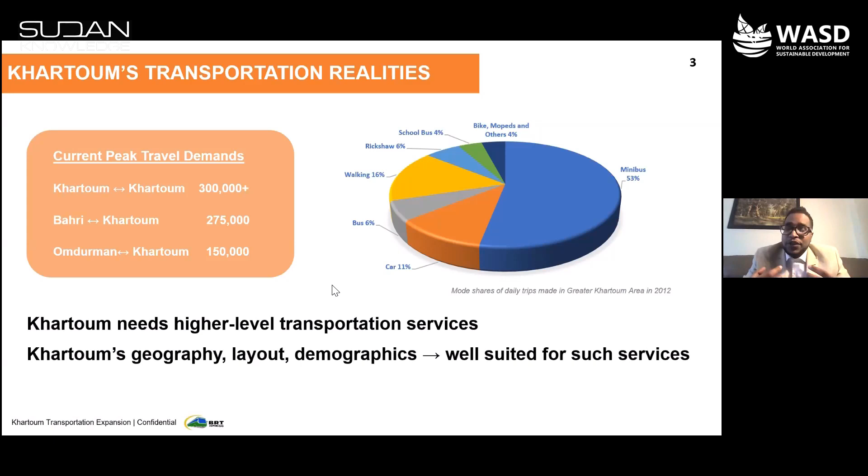If we dedicate lanes in the BRT system, we will be able to cater to more traffic. About 40% of the traffic will improve. There is cultural acceptance to public transit, and there's a large young population who will use this public transit. We will innovate. We are not looking to reinvent the wheel here. We're trying to solve a problem and create structure for transportation in Khartoum.

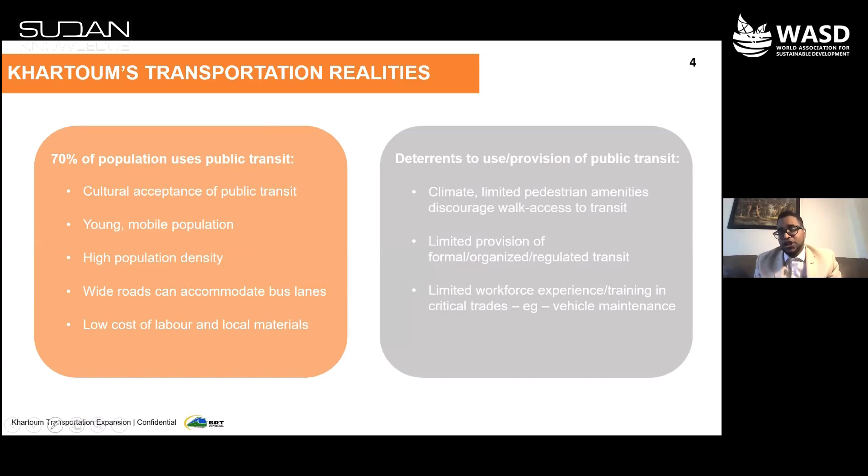A lot of the issues happening in Khartoum, and our report shows that every $1 invested in transportation has a return of investment of about $4. This shows there is a lot to be done, and it will benefit the economy of Khartoum a lot. It would reduce a lot of the health risks to have our BRT system set up in Khartoum, and reduce traffic congestion. There is urban livability improvement, and the air quality will improve.

The slides here show the layout of Khartoum and how transportation will improve this. We have a report that breaks down the feasibility. That report is also in our BRTEXPRESS LinkedIn account. If you click BRTEXPRESS on LinkedIn or search it, you will be able to see our report and our presentation. The report gives a detailed breakdown of how the project is feasible. We also have a construction company that broke down options of the BRT system.

Adam will go into details about this. Adam, if you could share so we level up with everyone about the issues of the BRT and explain what BRT actually is. Do you want to share the video, the one-minute video about the BRT that we have done? Why don't we, if you can pull that up, Hussein, I don't have that ready to go right now. But I'll take over.

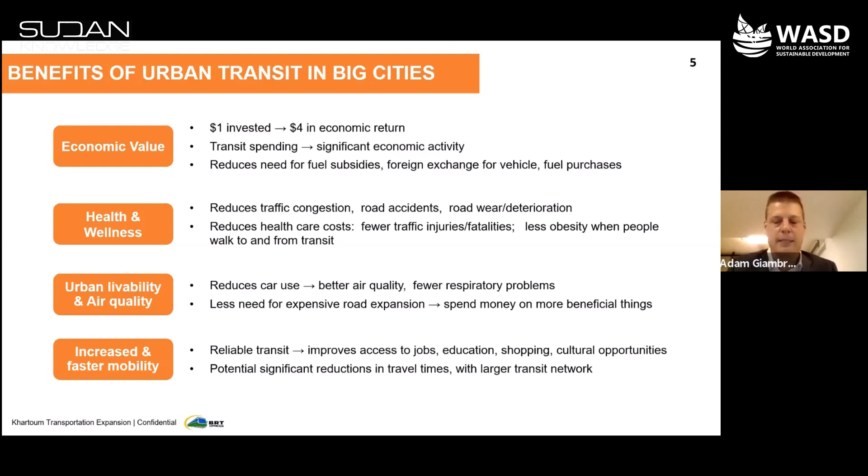So very quickly, and I understand we are tight for time, so I'm not going to go through every slide here. We have put it up, as Hussein said. I put the report. We have close to a 100-page report that we presented to the minister, and you can see it there, so there's lots more detail, and I've also put this presentation up if you'd like to review it.

But very quickly, we reviewed the different modes of transportation. What I think you're going to find here is that our focus on transportation is about being realistic. Khartoum is a city of upwards of 8 million people, growing perhaps to as much as 15 million by 2040. It is one of the fastest growing cities in the world, and anybody who knows Khartoum knows how fast it is growing.

But realistically, in the context of Sudan today and in the near future, options like a large subway or metro system, or light rail that cost in the hundreds of millions of US dollars per kilometer, are just not realistic. They also take a long time to implement in terms of the engineering, and because of the specialized technology, require a lot more hard currency.

So you're going to see, as we talk about bus rapid transit, that this is a solution that is implementable with the current expertise in Sudan today, which means you have to do very little bringing in people or equipment from outside. We've also put it in the context of a system that can meet the demand.

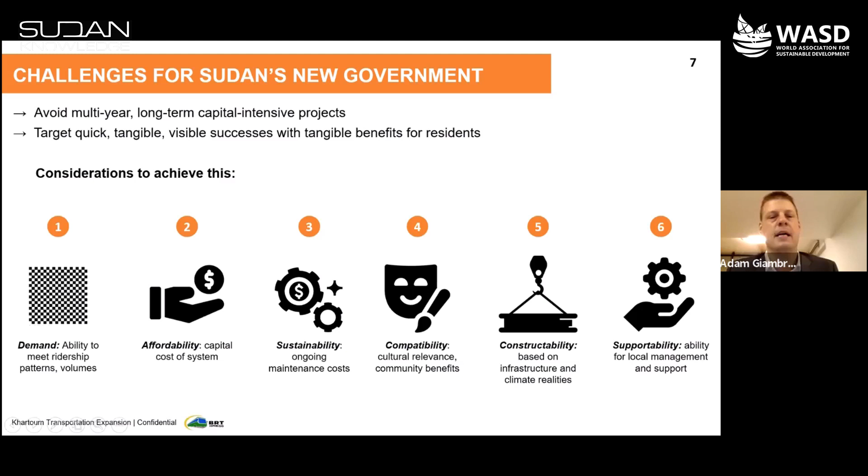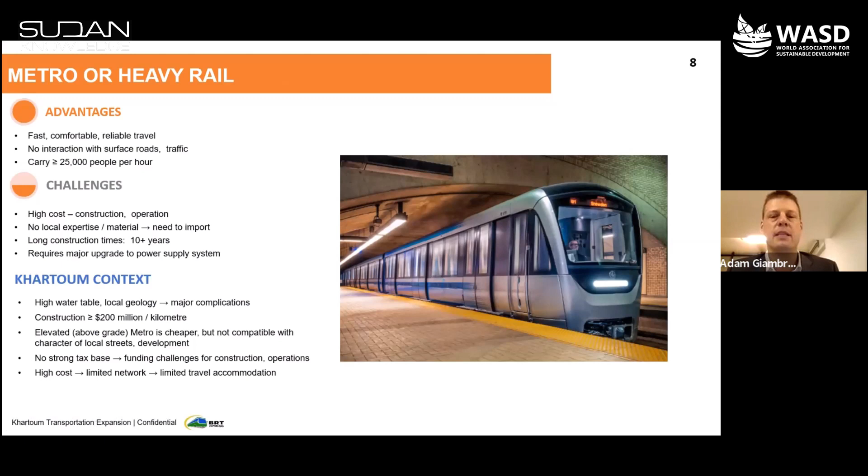Again, not going to go through this, but this is more in detail in the report. Our review of the metro and light rail - great systems, incredibly expensive, and upwards of 10 years to build. So they're not a quick solution, even if you have the budgets to do it.

So we arrive here at bus rapid transit. Lots of examples around the world, over 300 cities on every continent except Antarctica have these examples. They're being used in places from Europe and North America, from Asia, Africa, and it was actually developed in South America in the late 70s. The main reason it was developed is to be able to deliver new transportation routes quickly and cost effectively, so there doesn't have to be huge disruption.

And with the right innovation, they can move enough people per hour. In some cases, in Bogota, Colombia, they're moving upwards of 20 or 30,000 people an hour, so that's the equivalent of a metro system. The proposals that we have here are slightly less - they're not quite as big as the ones in South America - but could still carry well the capacity we need, especially if there are multiple lines.

Because they're developed, the model we really have here is ultra low cost, so you can deliver this without the buses being a major expense. That's of course a cost, but the infrastructure is under $1 million a kilometer, well under $1 million, close to perhaps $500,000. So this becomes much more realistic.

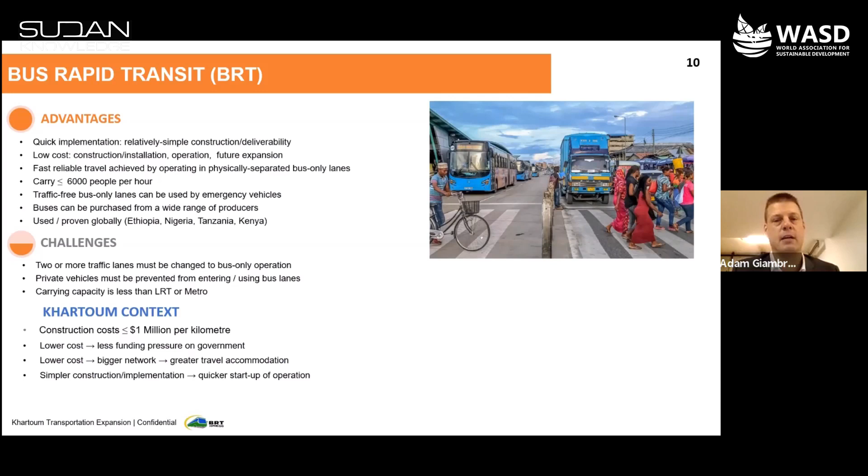As we know, with the priorities and challenges of the new government in Sudan, there are lots of demands for money. So having a system of transport that does not require ongoing government support is, I think, critical, being realistic about the next, say, 5 to 10 years in Sudan.

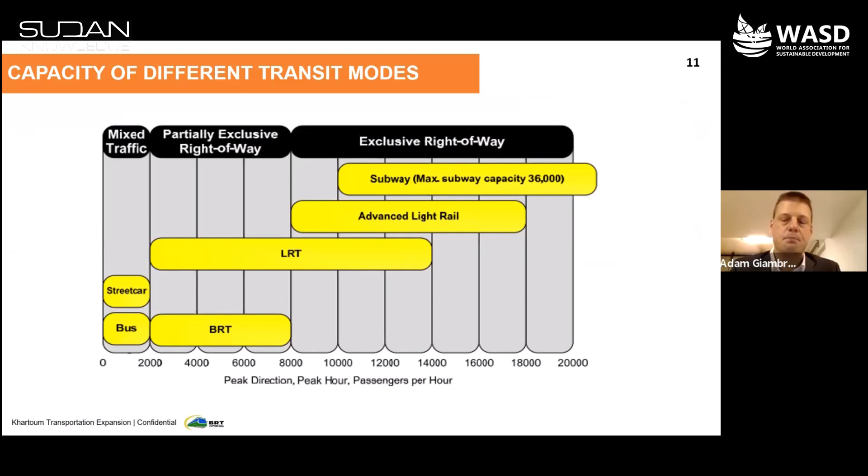Here's some background on the capacity modes. Again, at the bottom, we're talking BRT. It's at the lower end, but where we have corridors with a lot more people coming in, say from Omdurman or south of the business center, you could look at more than one route. So not only does that bring rapid transit to more communities and neighborhoods, but it allows the demand to be spread out.

This is the review we did, much more detailed in the report, and that's why we wanted to share it with you for those who'd like to go into it in a little more detail. But basically it concludes that realistically, the best option is BRT, and it's not so much a compromise solution. As I said, this is being used in 300 cities from China, Europe, North America. Many cities choose this for the same reasons we're talking about it for Khartoum.

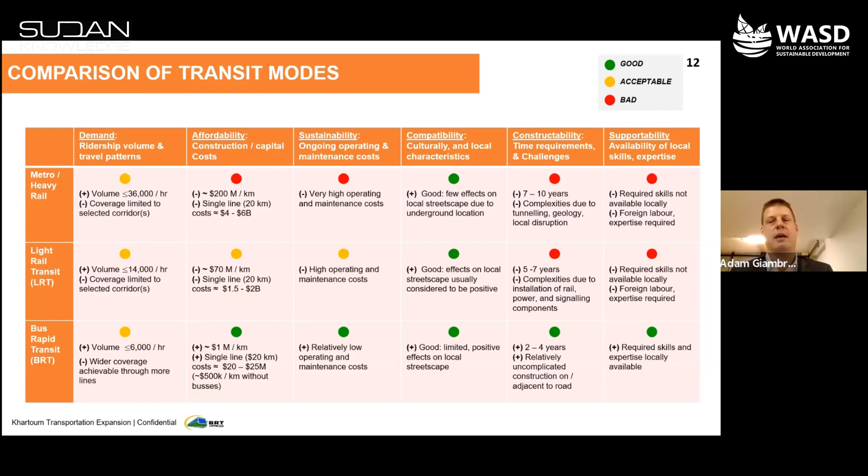So I talked a little bit about the benefits of BRT in Khartoum, and now I just want to get into a few more details, show you a few pictures of the work we've done, and reiterate.

So what we are talking about, just to be clear, on bus rapid transit, Nizam Bus Sari, these are fully exclusive bus-only lanes, and you'll see some pictures of them on the right hand of the screen. They have a physical separation. I think some of these are from Lagos and elsewhere in Accra in Ghana. There are some new systems in Nairobi and Ethiopia as well. But the physical separation is critical.

It means that literally cars and trucks cannot get into the lanes. They are in the center of the road, so they don't block any of the parking or deliveries, which often happens on the sides of roads with people stopping to pick up things at stores.

Obviously you can enter them at intersections, so we have some work to do thinking through that, because anybody who travels around Sudan knows it's a little hectic when driving at intersections. But we're thinking of the use of the harkat and some other design elements to prevent people from entering it.

It also works on a series of stations where you pay your fares before getting into the station. So for example, you won't see any kumsaris on these buses. These have a driver. People go in and out, and all the fare collection and the time it takes to make change, all of that's done at a station at every roughly half a kilometer.

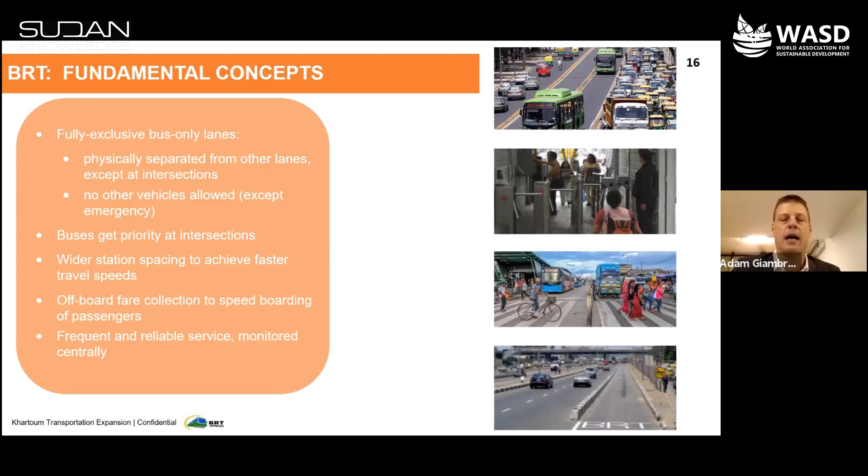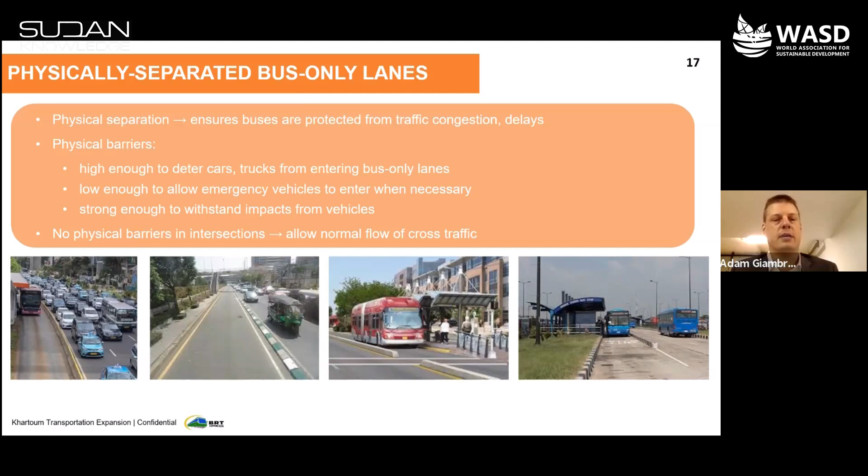So what we have done, and you're going to see shortly, is some of the design work. The team is made up of local engineering firms in Khartoum, because in my experience working in Saudi Arabia, Sudan, and elsewhere, you need a strong local perspective and understanding. All materials have to be local, and we have to think about durability. Having people on the ground who did all the surveying, we went out and surveyed all the roads to make sure what's being proposed is realistic. We combined local expertise with international expertise, a lot from large public transit agencies in Canada and elsewhere around the world. So the team is really this mixture of Sudanese and international expertise, but driven locally, and that's really critical.

These are just some pictures we've talked about. Obviously these stations, there are lots of different designs. You can do a lot with these, they can be very fancy. Some look much more like metro stations. Ours is being practical at the beginning in order to get this up and running relatively quickly, and as we said, without the need for government subsidies.

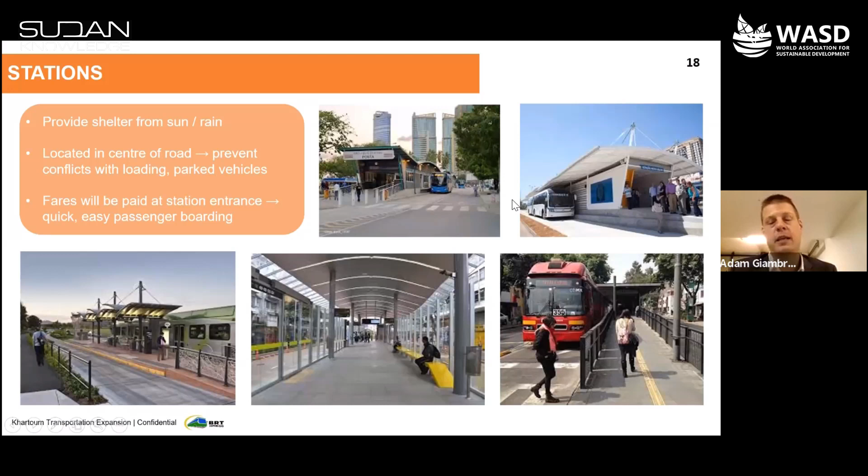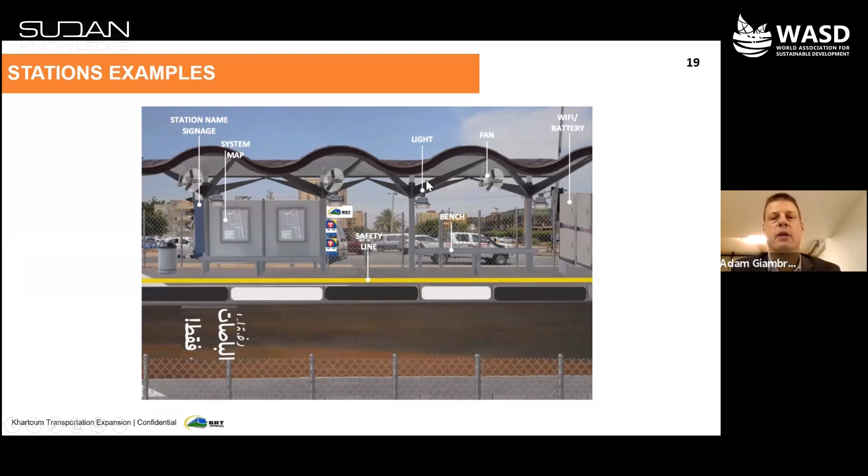So here are some of our initial designs for the stations. Everything here, including the roof, is actually material made in Sudan. That roofing is from a factory in Khartoum, and things like the cement are also made in Sudan. You'll see they're relatively simple, which makes them durable, and that's something you think about when you build it, not having to have extensive maintenance operations.

And you'll see at the beginning there being these turnstiles, every half a kilometer or so. Our report shows where we've looked at the engineering and, through on-site surveying, actually determined where they can fit, because you have to look at each block of the city.

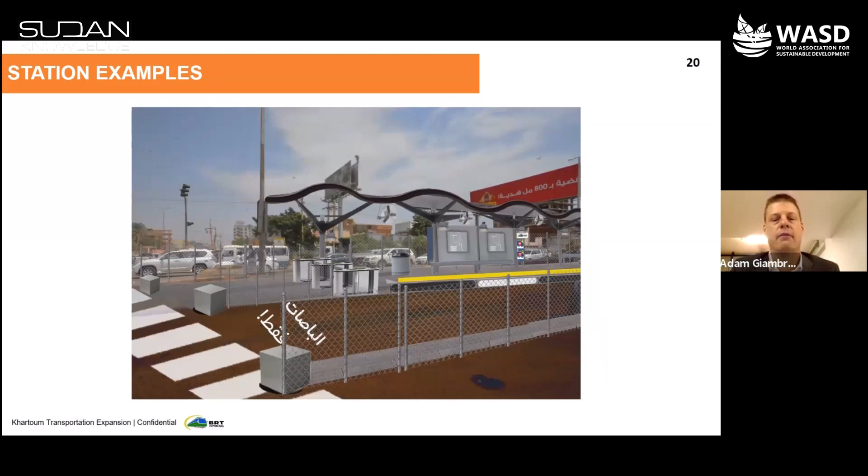So we talked a lot about the pilot project. We've pitched one line, partly because you always have to start with one, but also because these are new ideas and you need to get buy-in. It's all very good to just come and plop a solution in, but as we change the governance in Sudan, what I think you want to do is talk more to people about this, instead of just putting in solutions, because wherever you go, there are some people who are going to like it and some who are not.

As Hussein said, the amazing thing about Sudan, from our recent work, is over 85% of people are walking or using public transit of some nature to get around—70% on public transit, the other 15% walking. This compares, just to give an extreme example, to Europe or North America, where if you're lucky 25 or 30% are using public transit and walking. So from a political or community perspective, the ability to actually serve 85% of the people is significant.

So you do take two lanes from traffic. I know there's some concern about that, but the good thing about bus rapid transit lanes, when organized in the middle, is that it helps organize the traffic—people turning, going all over the place, roads where two lanes sometimes merge into three. The reality of traffic in Khartoum, based on experiences from other cities, is that while a BRT does reduce lanes, that's only if the government chooses not to widen the roads. We haven't proposed that, because widening roads sometimes actually creates more traffic than it reduces. But this actually organizes the lanes, similar to a median, in some cases.

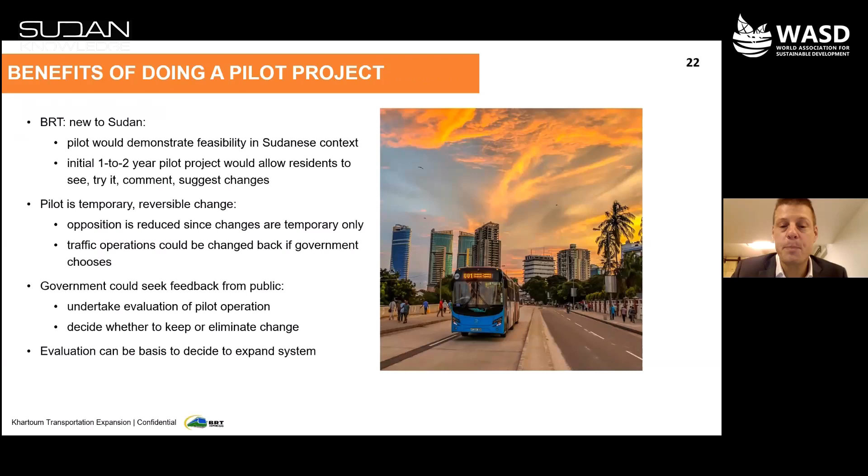Slide 22, we've spoken to it, like we mentioned with the minister. It's important to start this as a pilot project. During the pilot project, we hope the government collaborates with us to assess feasibility in the Sudanese context. The BRT is new to Khartoum, the infrastructure needs work, and we hope the Minister of Infrastructure and Transportation works with us to assess feasibility well.

We would also seek feedback from riders through public consultations. We want to engage with people, and I think this is the perfect environment we're in here, to get feedback on what they think should be, where the pilot project should be.

Like I had a conversation prior to coming here, some people say it would be fancy to connect the pilot project to the airport street and access to the airport. If we were to have a BRT access to the airport, that's an idea. So having the pilot project will allow us to test what people actually wanted, and that is very important.

We really hope that the government collaborates with us so we could get good feedback on the feasibility and viability, and the work the government is hoping to change in the BRT network. This will be used to decide the expansion of our BRT network. I'll leave the next steps to you.

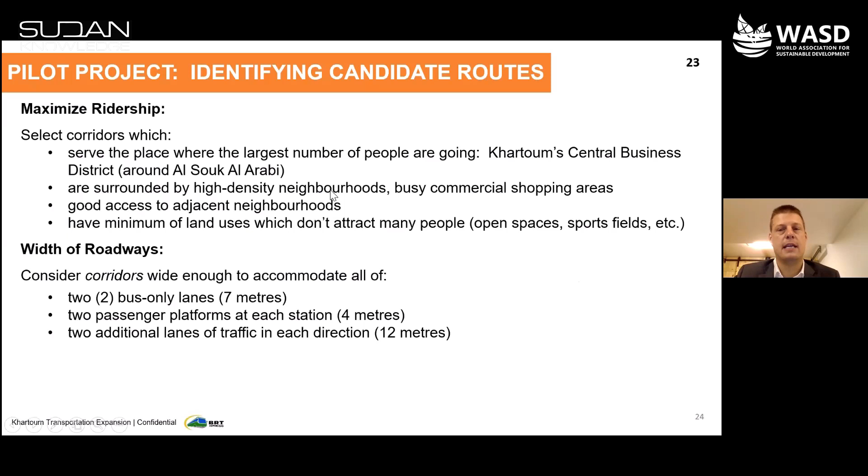So just to pick up where Hussein left off, and keeping this high level, we are proposing a number of different initial routes. This is obviously not final, covering the twin cities of Omdurman and Khartoum, along with Bahri in the north. There are lots of options. When you're doing studies, you have to scale things down.

One of the reasons we focused the first phase south of Khartoum is there are no bridges, and we know some of the bridges are quite tight. Actually, sorry, the red version does have a bridge, I think it's Huria, because it goes over the railroad tracks. That was one of the things we looked at for feasibility of each route, along with on-the-ground surveying of the route block by block.

Again, we looked here at the options. It gives you the range of kilometers, the number of stops. Obviously they change a little bit, but you'll see a lot more details in the report.

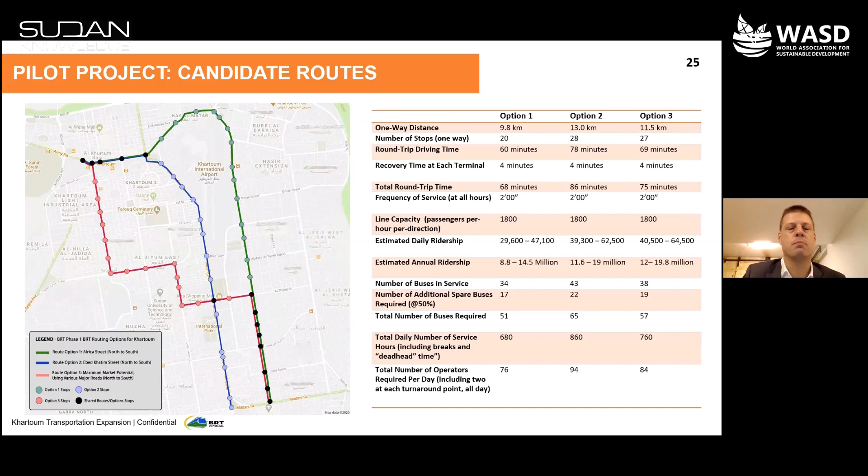We need to know things like ridership, so we can estimate the number of drivers, buses, costs—all much more detailed in the report, because that was part of our needing to not just evaluate the cost of building, but the cost of operating, because that's critical. Once you build it, you have to maintain it and operate it.

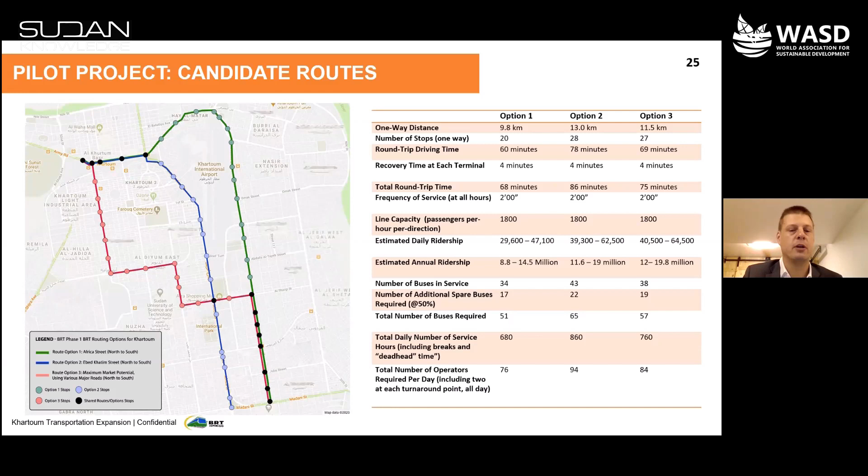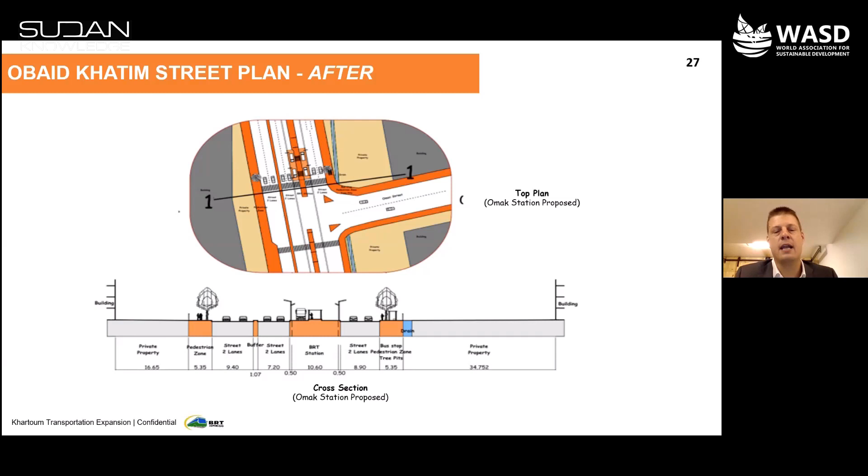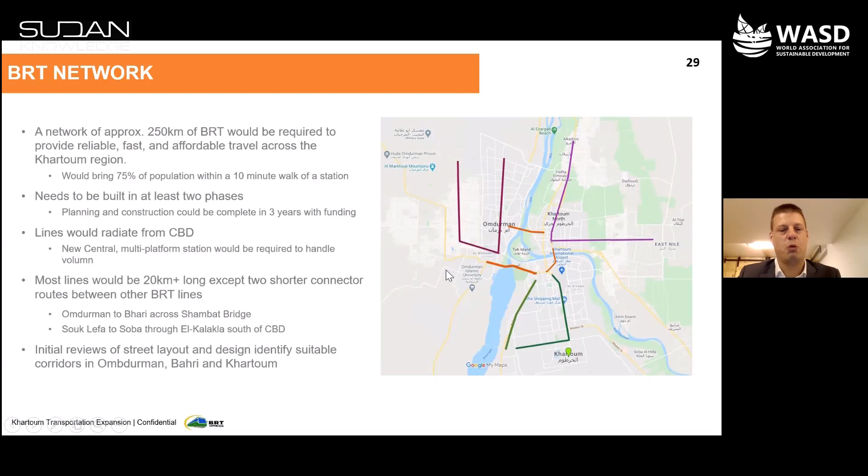So this is where we looked at it, not going to go into the details here, more in the report. I will say, when we met with the minister, he was quite interested because they have already been doing other studies about looking at transportation corridors in Khartoum, and these ones match up. These are not exact because, as I said, they require a lot of studies surveying every meter, but these are the major transportation corridors in Khartoum. Obviously, you can add additional ones. Lots of people are moving, millions of rides, but these are sort of the initial screen, and they did match up with the work that the ministry, Bunya Tatia, had been doing anyway, which was quite nice when you have the minds coming together in a similar fashion.

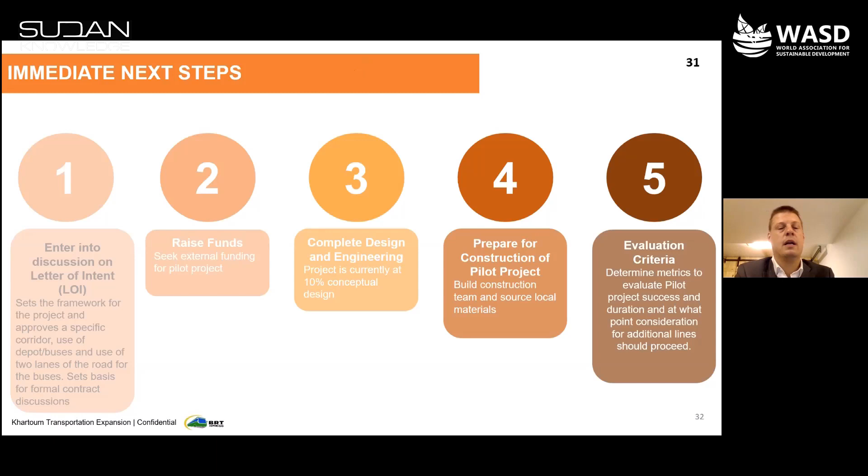We've got, once we get approval to do this, we're looking to go ahead and get the funds, finish the design. We think that from approval, and this is based on the construction teams in Sudan, because the construction is relatively small, you have to put in barriers, but this is all produced locally, so you could have this up and running within 6 months for the first line. You can obviously do more depending on how much you want to do, but this is relatively quick to implement, and that was critical. That's a longer proposed timeline for a bigger project.

I'm going to try very quickly, because the video is 1 minute. If I'm smart enough here, I'm going to see if I can actually pull it up. I don't know if I'm going to be able to do that, but let me just see here on the video chat if I can do that.

I don't know if I will be able to do that. Hussein, I know we're very tight on time, so I'm mindful of that. I don't know if I can actually pull it up. Hold on one second, here's the cat, sorry. I can do it, let's see, right now.

And we can sort of, it's halfway there, I think. Just make sure you click on that share computer sound so it can actually come through. That will be a good thing to remember. Okay.